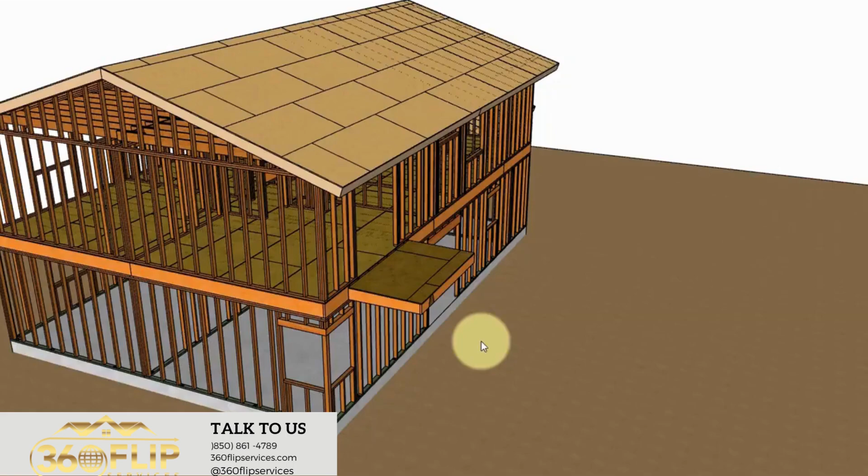In this video, we are going to take a look at a couple of ways to repair a damaged cantilevered balcony floor joist. And I will leave it up to you to figure out if this is going to work for you and how many of these floor joists you could fix if they were damaged using these methods.

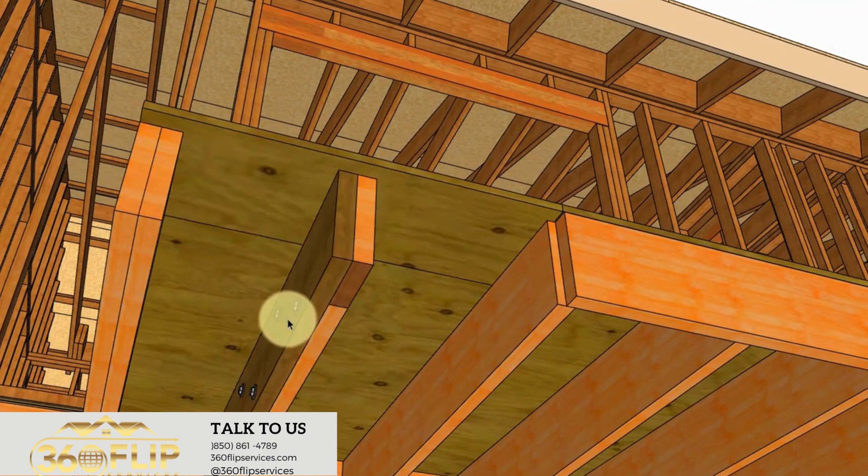And the first method I would suggest would be to cut a new board and bolt it to the existing one. And in this example here, we have 16-inch on-center bolts, and they are staggered. And we are using 3/8 of an inch diameter bolts for this example.

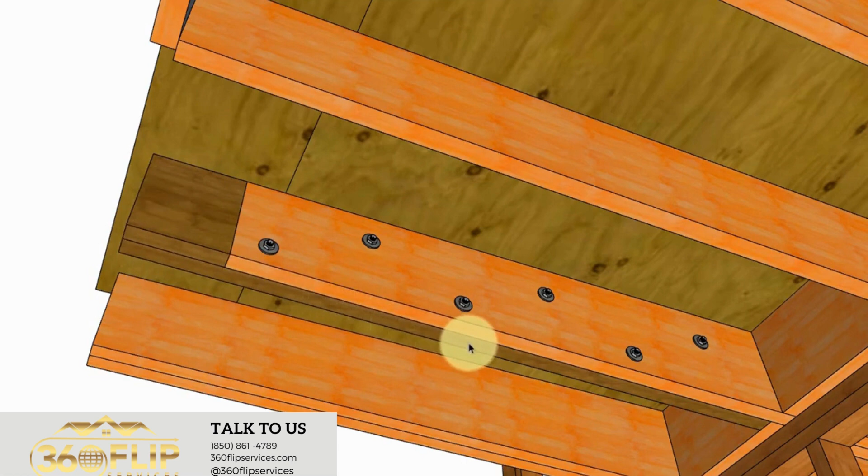Now, I want to point out that the rotted area should probably be cut away and removed, and then you could just install a new piece there. And you could always bolt it to the new board or use screws and nails. And keep in mind that this board right here, the new one, is going to be the main support. And this one right here is just going to be for decoration. So keep that in mind when you are doing this type of repair. So this is the first method, probably going to be the easiest method.

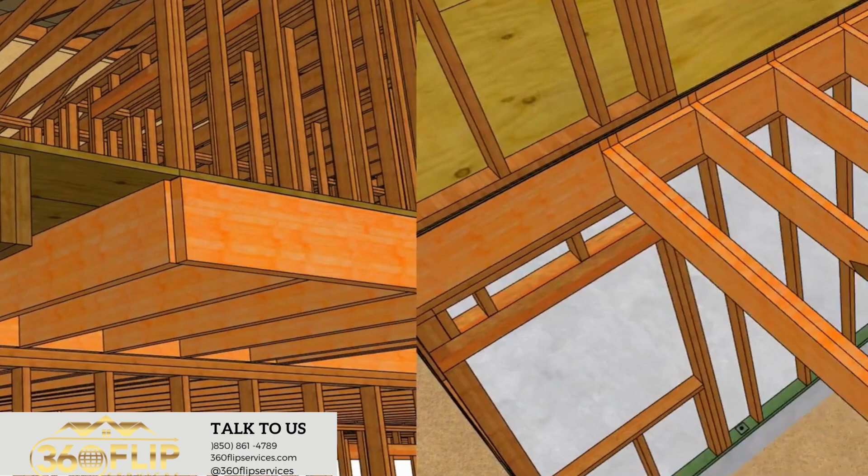However, here is another method that might work, and in this example here we're going to use a scarf joint. And I'm not going to go into a lot of details on the variety of different joints you can use. However, I am going to tell you that something like this could pull apart. So if you could imagine having some type of pressure here, this could be the pivot point, and this could actually pull forward and then drop down.

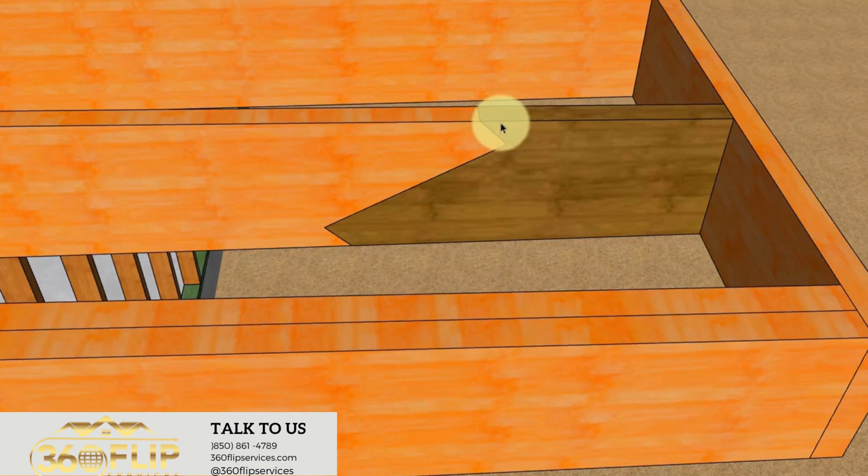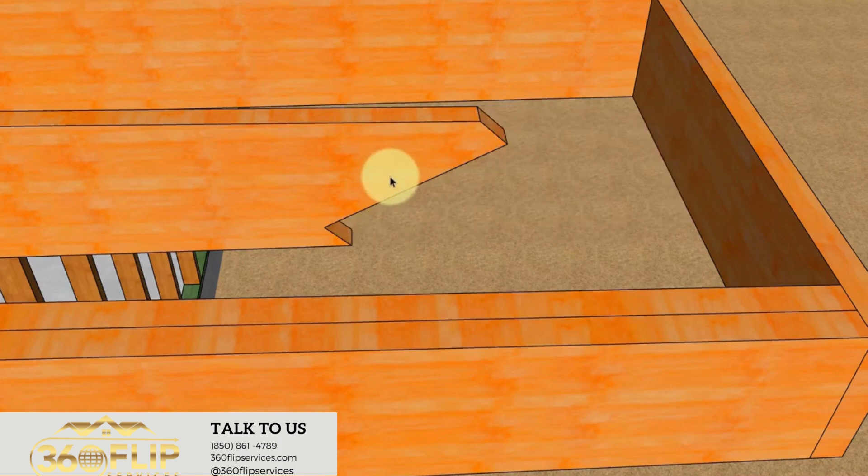And the key here is that you want to prevent this from moving forward. And I believe you can do that with the plywood sheathing. However, I don't think you could do it with decking. If you have 2x6 decking, probably not going to happen. And you will need to use additional structural support like straps.

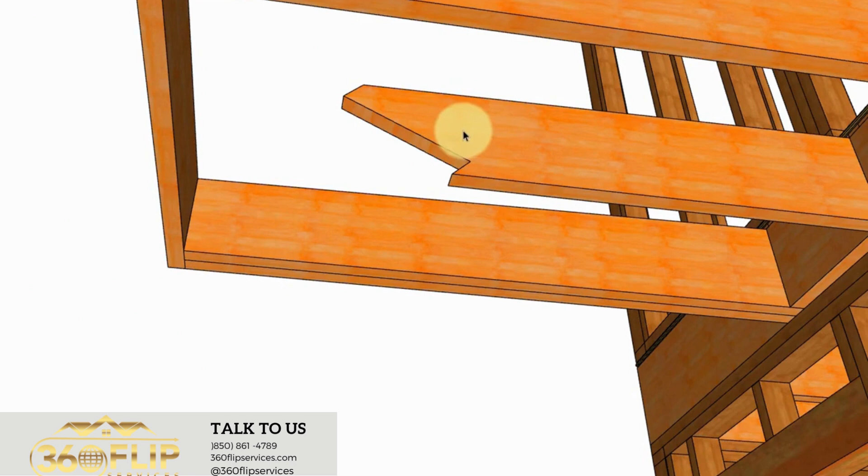And I don't think you need to be a rocket scientist to figure out that this method here is not going to be as easy as the first one. However, this method right here might look a little bit better from the bottom. And if you only have one joist that is damaged, you might be able to get away with it. And keep in mind that with the damage here, you won't need to replace the entire rim joist because the main structural support is going to be from the cantilevered joist.

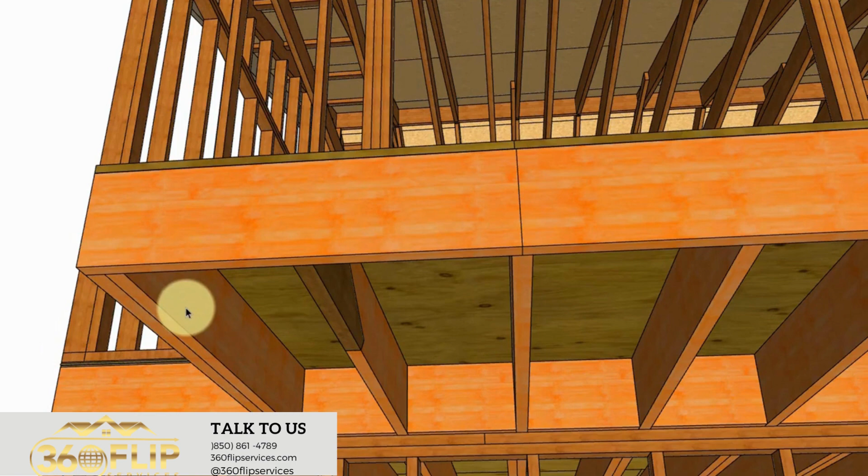And let's not forget that this repair here is an alternative to removing and replacing the entire joist. And that's what you might need to do if you have a lot of damage or multiple joists that are damaged. That wouldn't allow you to use any of the repair methods in this video.

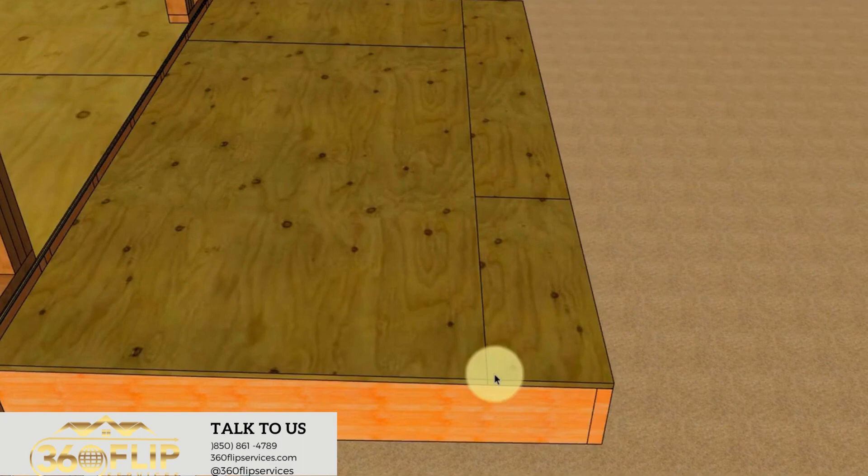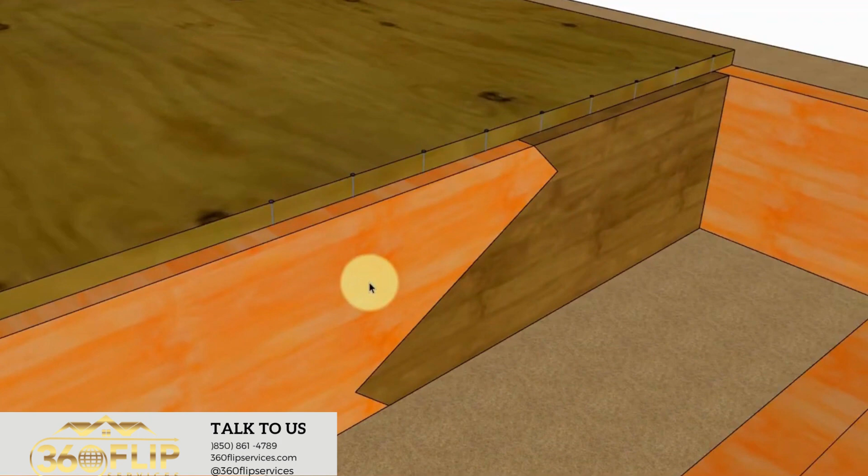And another thing I want to point out is that the break in the plywood probably shouldn't be within 2 feet of our break in the joist where we are going to be installing our scarf joint. So something like this, where we're using a full sheet here and then our smaller pieces here, is going to provide us a little more structural support. For example, if we use the plywood sheathing in the same way that we use a strap, we could put nails on each side of the break to connect everything together and prevent it from coming apart.

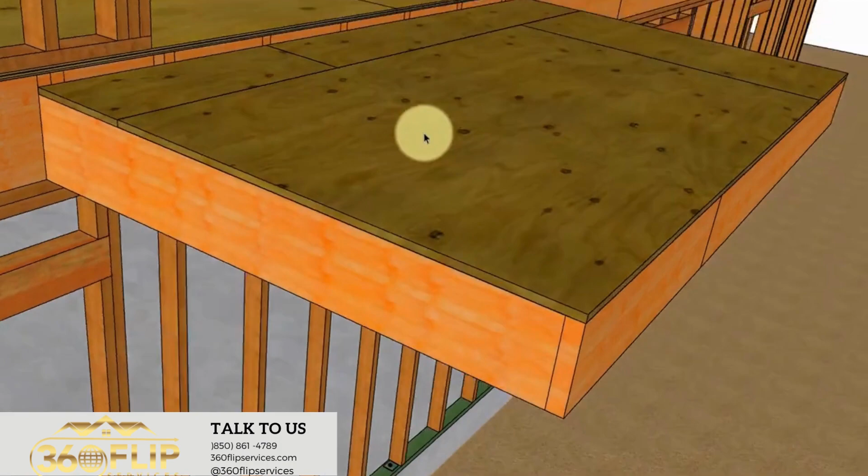So if we had a break in the plywood anywhere in this area here, then we would simply be nailing one side of the plywood and the other side of the plywood, and we wouldn't be getting any structural support. Whereas we're going to get the structural support here because we're using a solid piece of lumber. And if this was enough to prevent the new piece from moving forward and falling down, then we would have a nice solid repair. However, if that does not make sense, maybe this will, and that would be to install a strap on the top.

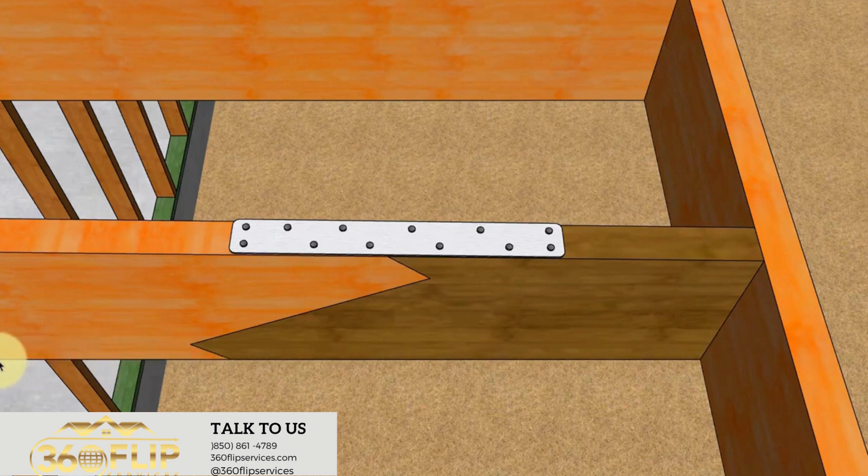And let's not forget that you could always use longer straps, using a strap long enough to connect the top of the existing joist and wrap it all the way around the front of the rim and then go underneath the joist and go back about 2 feet away from the break on the bottom and the top to prevent this from moving. And if you're looking for a little more support, you could always add a strap to each side. However, I think something like this might be a little bit overkill. You can always get rid of the one on the top and just use the ones on the sides.

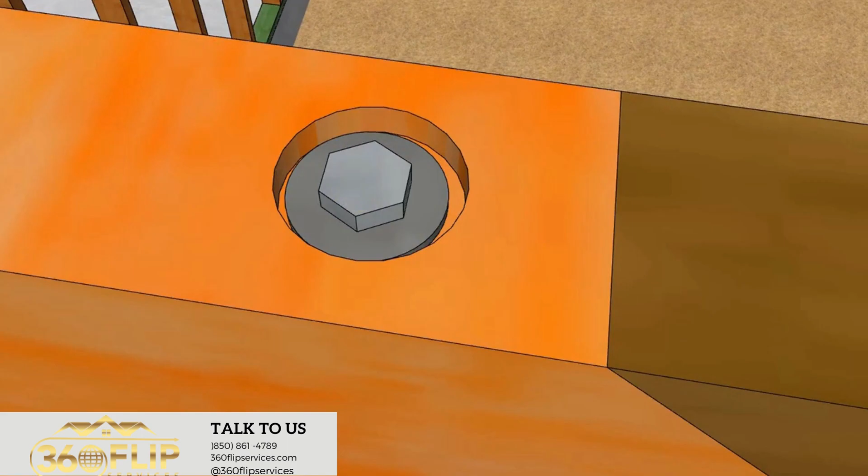And if you don't like that idea, you could always use a bolt or an all thread. And in our example here, we might be using something about 3/8 of an inch in diameter. And you would simply countersink a hole here and then drill a hole all the way through both pieces of lumber, and then install a nut and a washer on the bottom to prevent this board from moving forward and ruining your repair.

And for whatever reason, if any of this stuff does not make any sense, then definitely don't use it. Contact a structural engineer or a local contractor or building authority in your area for additional information.